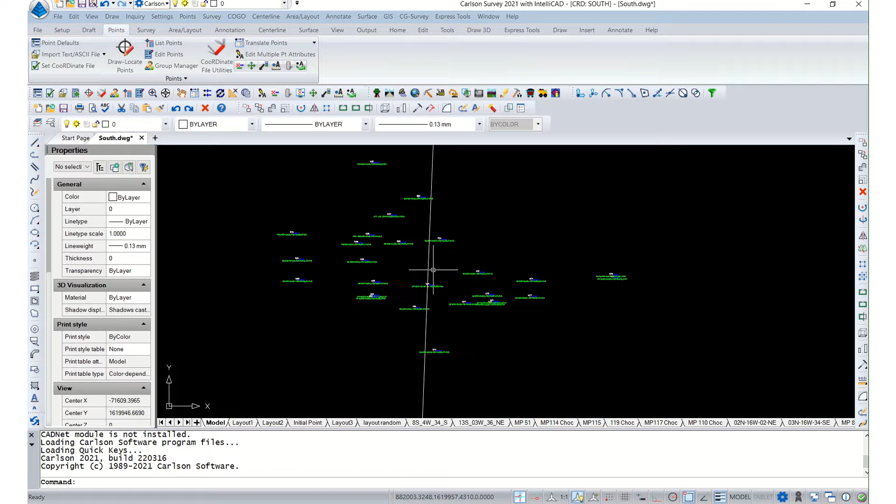Point in Nevada County, southern Arkansas. It's a PLSS corner, which is a railroad spike in the middle of a road intersection, so it's in asphalt. We took enough shots to get enough information to add to the sketch: the intersection, fence line, and we were able to measure all of our references with GPS.

So we're going to put the whole drawing together in Carlson. I'll start with just kind of sketching in these roads. Actually, I'll start with measuring to the references.

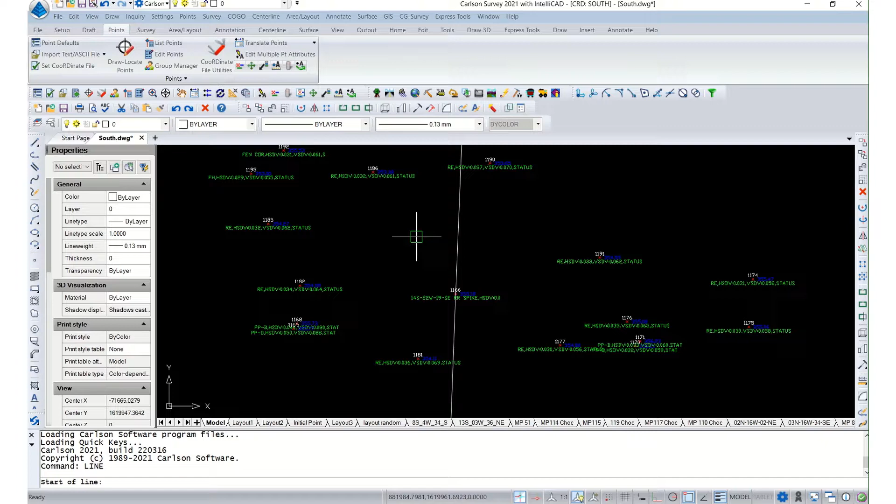So we'll do a line command. 3 of these references are power poles and 1 is a fence corner. That's our main point in the road, a railroad spike: Township 14 south, Range 22 west, Section 19, southeast corner. This fence corner is one of our references.

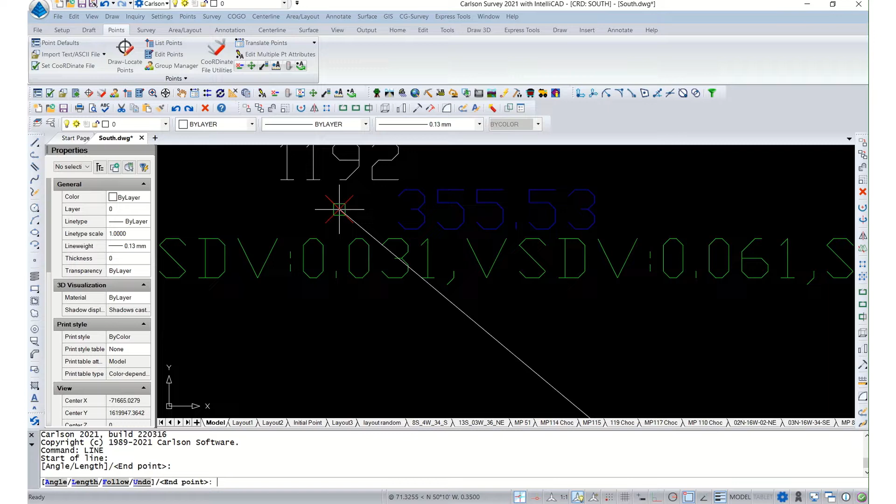Go ahead and draw another line. This is a power pole. I take 2 shots on a power pole since I'm using GPS, so I can get the center of the pole. We'll come back to that.

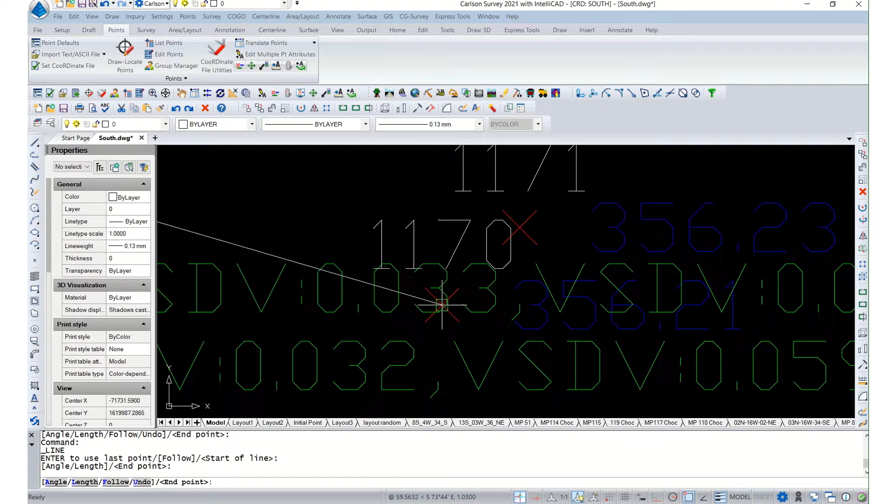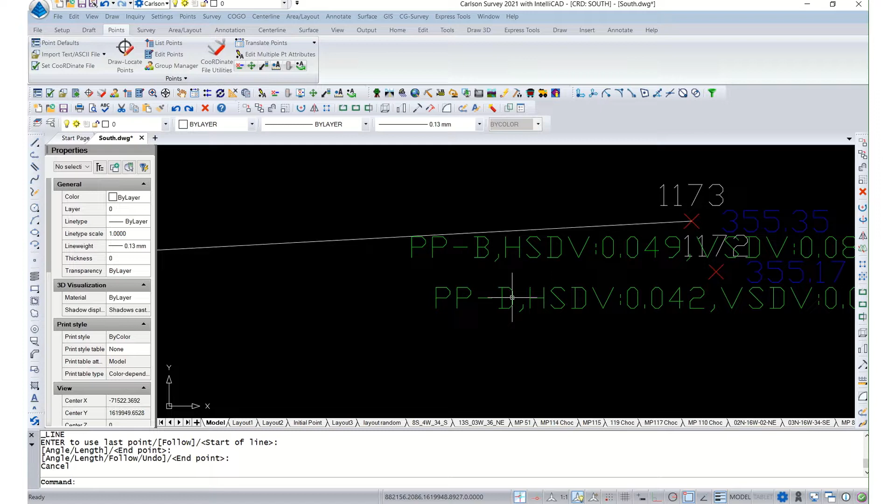Repeat line command. We'll go over this in just a minute. Let me get the other line in. And here it is. On power poles, I take 2 shots: one represents the bearing to the power pole, and one represents the distance to the power pole. So you can see this PPB is my bearing shot, PPD is my distance.

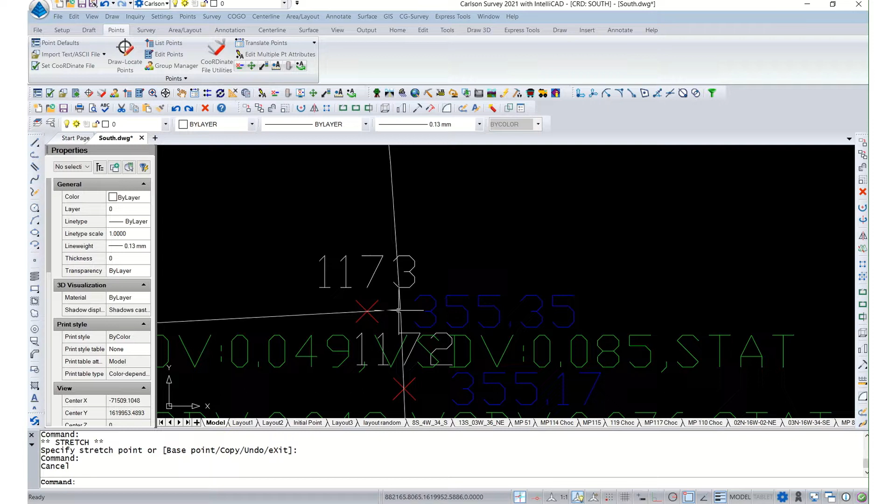We're going to adjust that point to estimate the center of the pole. Next I'll draw a circle, starting back at our main point. Snap to my distance shot. Make sure our nearest snap is turned on, which it is. And extend this line to the circle, so that point estimates the center of the power pole.

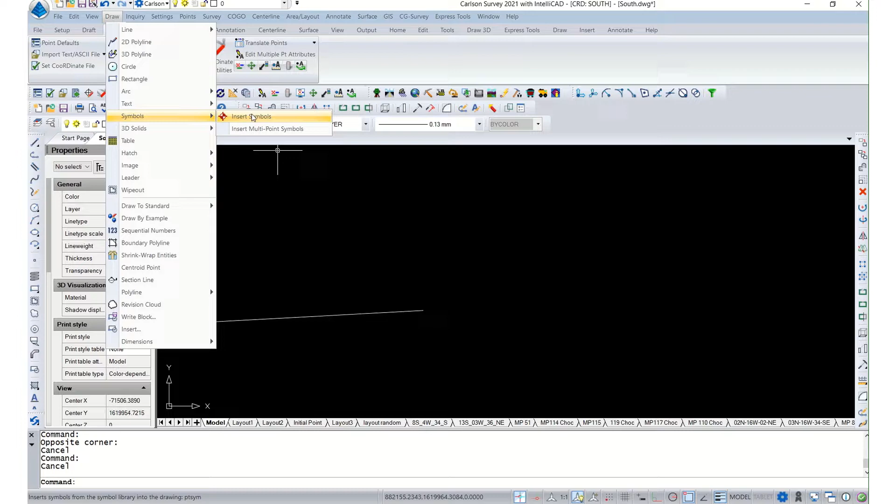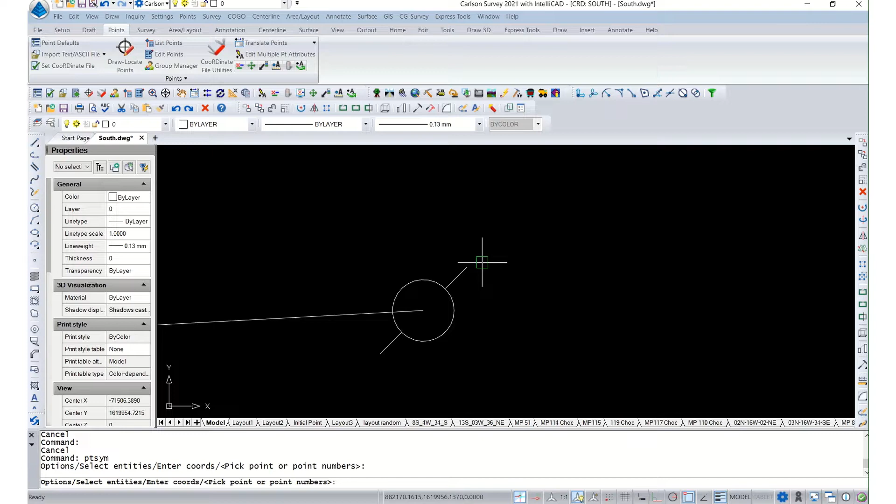We'll get rid of that, turn these off, go to my hide layer, then go to draw symbols, insert symbol. We'll change this to power pole symbol. Scale, I'll make that about a 6. Okay. And then snap that on there.

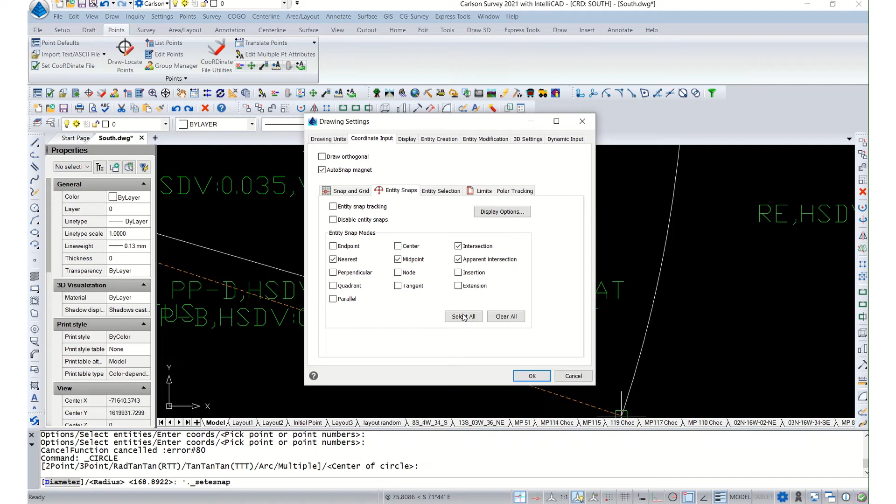We'll do the same thing here. I've got my bearing, and now I need my distance. Repeat circle command. We'll take my nearest snap off. Now we'll extend this, nearest. Try that again. Nearest. Okay.

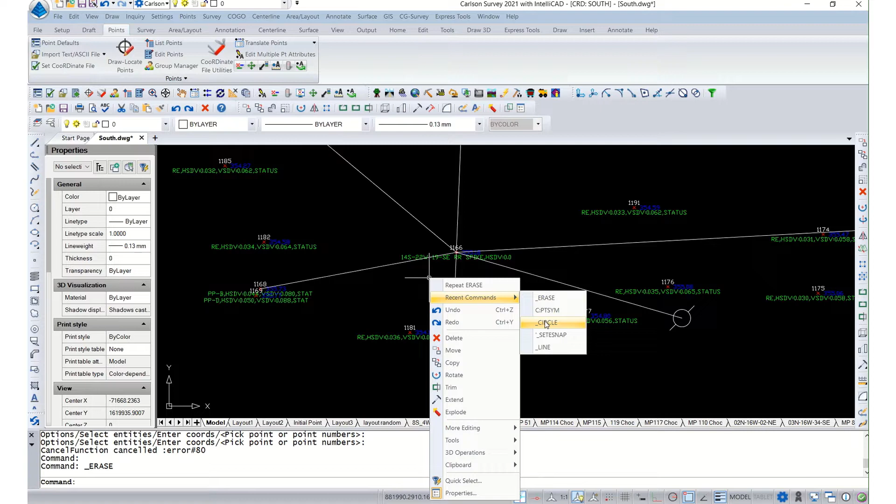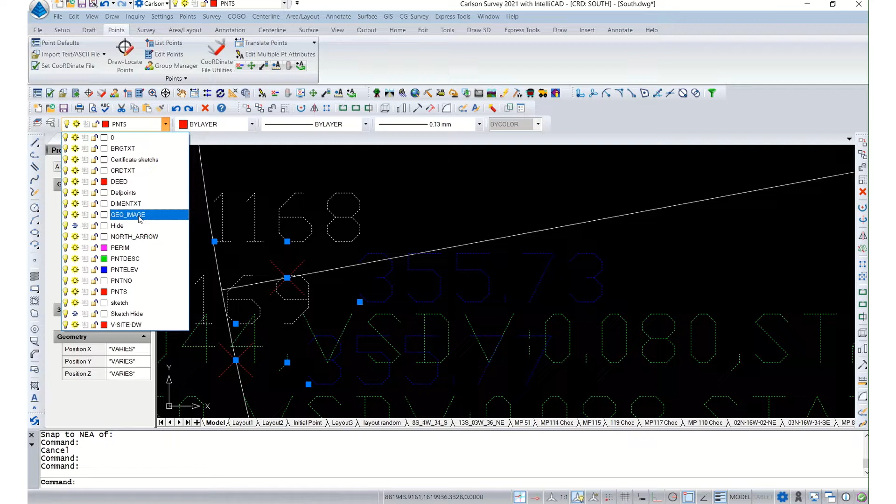Go ahead and turn these off. Repeat symbol command, everything's correct there. Pop that in. Get rid of the circle. Repeat circle command. Then we'll grab that, and then nearest, snap to. Turn those off. Repeat symbol command. There we go, get rid of that circle.

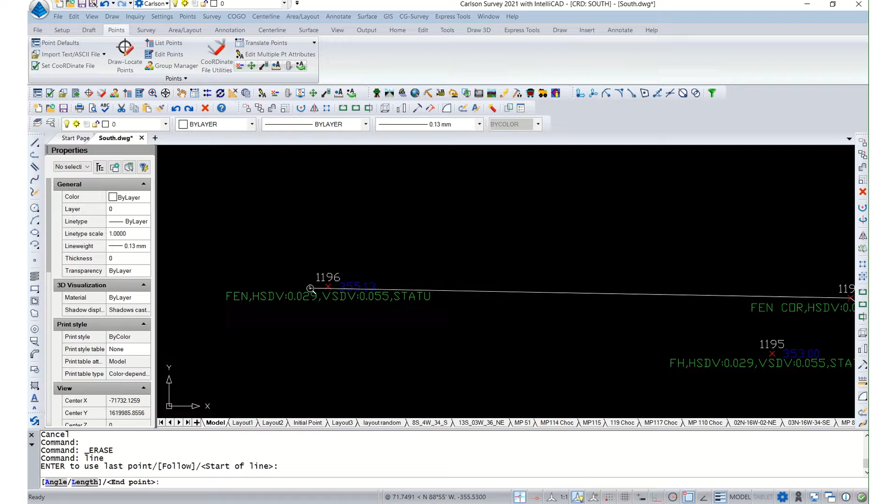Now that is just a fence corner, so let's go ahead and draw that fence in real quick. Let's do a line command, from here to here, repeat command, go from here to here. We'll change that from a solid line to fence line number 1. Line scale will start at 0.01, so that will look okay in paper space.

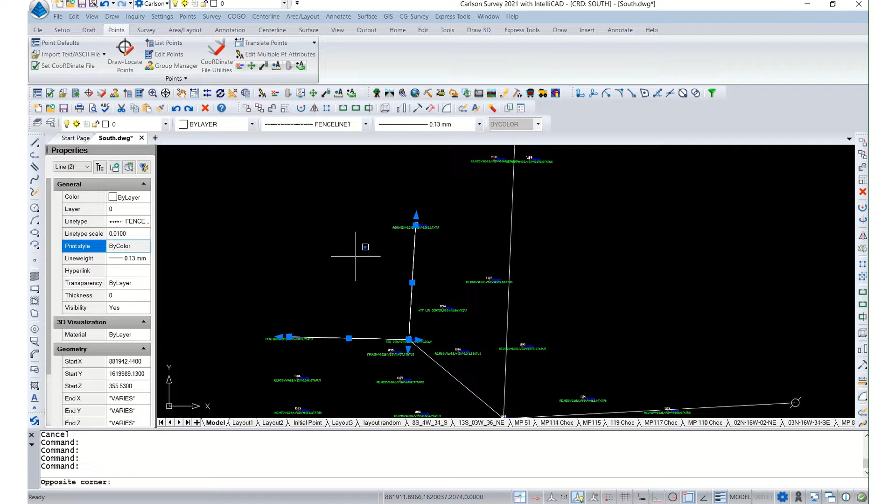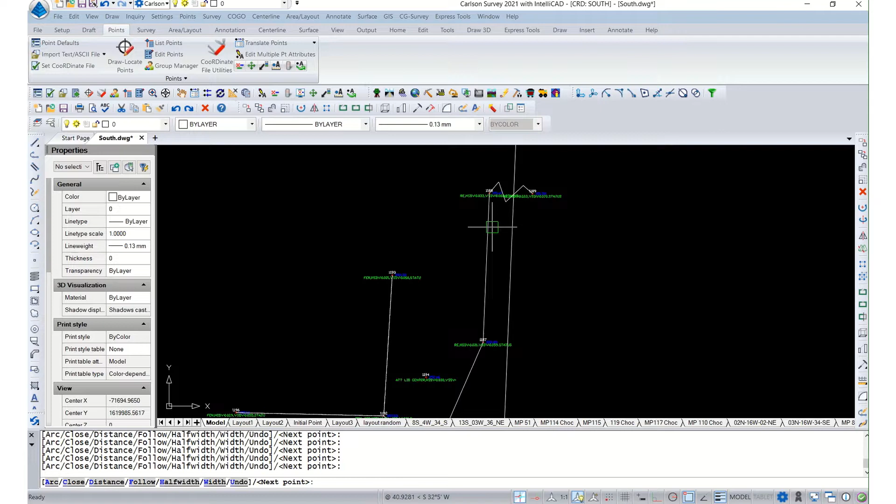Now I want to sketch in my 2 incoming roads here. We'll go to P-line. I'll start here, we'll draw these dirt roads in. Got a big radius on that incoming road. We'll just kind of put a break point there. Actually, I don't want to go that far. Let's do that again.

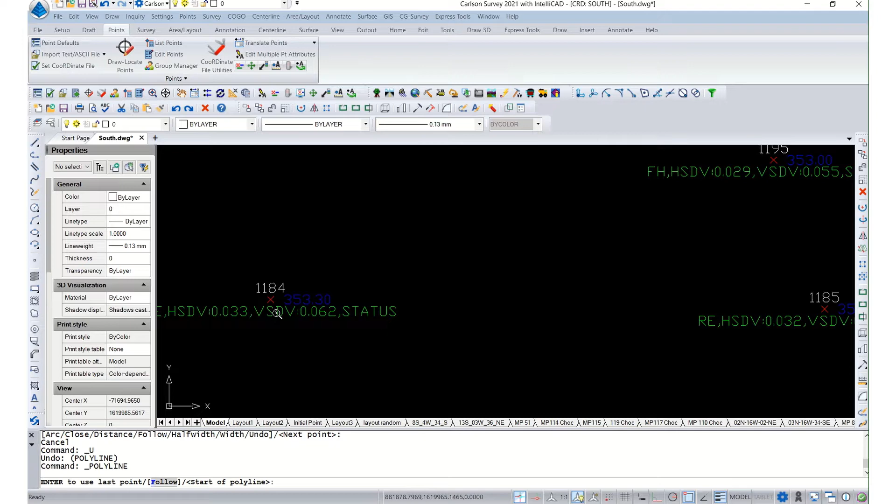So we have 2 different road types, so we'll do 2 different polylines. Road edge, road edge, road edge, and then jump all the way down to the other end of the radius, or the road intersection flare basically. There. Put a break in there. Okay.

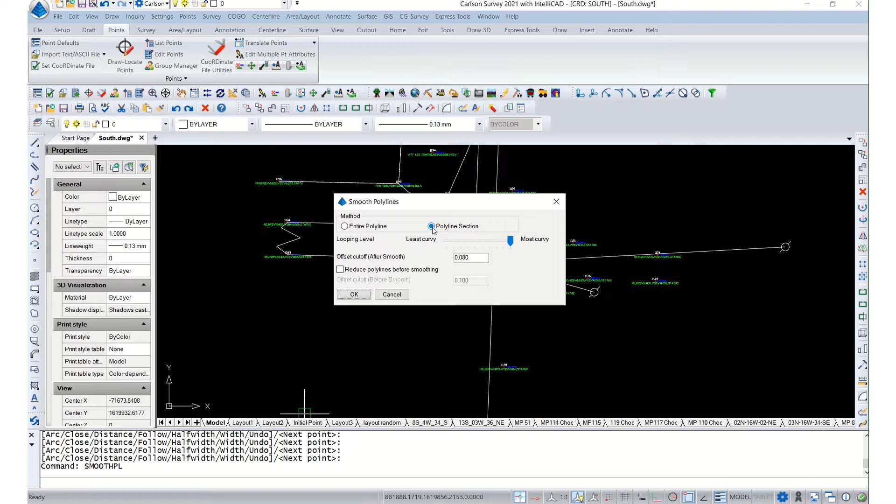Now I want to smooth those lines out a little bit, so command smooth PL. I want to do not the entire polyline, but a section of the polyline. Select polyline to smooth, select start point. Come back here, next point. Come up here. Bends it a little too much. Let's try that again.

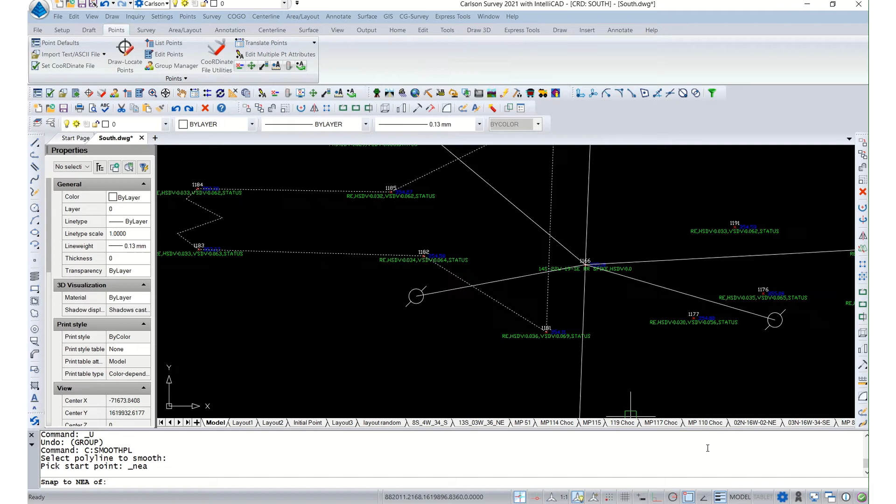Repeat smooth PL. Select that line, start point, select nearest, we'll hit it about right there. Now we'll hit that one. That looks a little better. Repeat command, line here. Start of curve, end of curve. There.

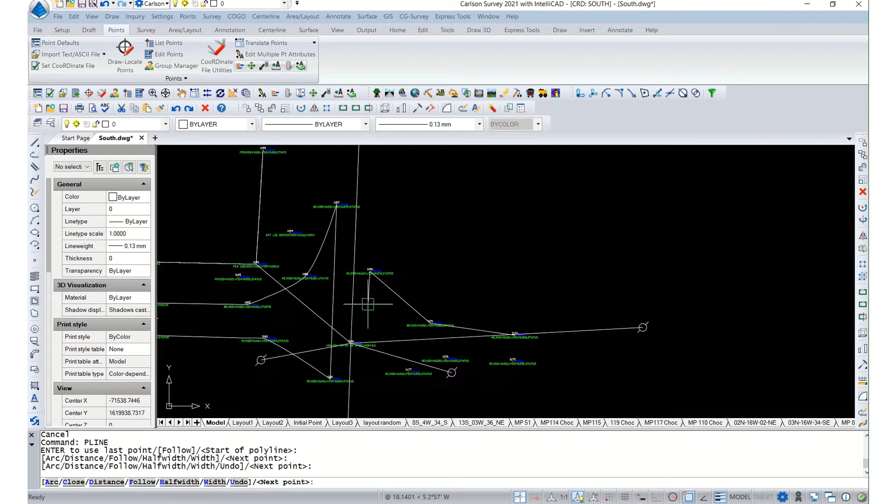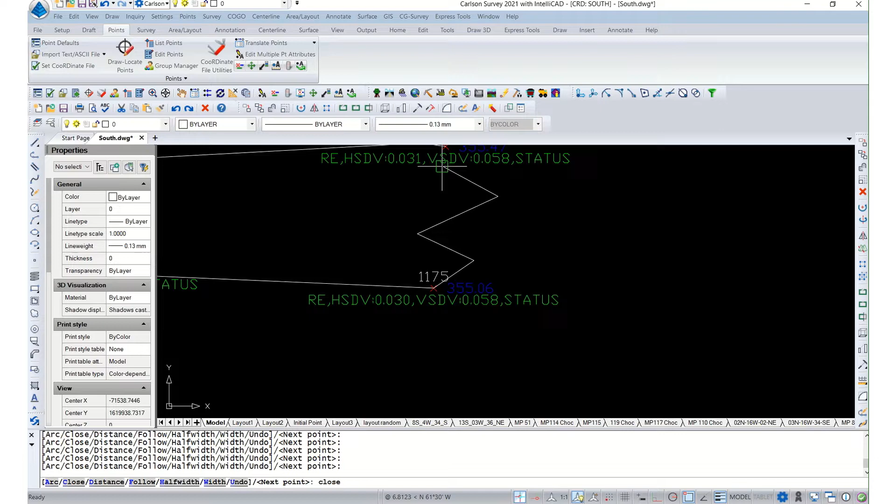We'll do the same thing with the other side. P-line: road edge, road edge, road edge, and then we'll jump down to the bottom of that intersection, road edge, road edge, break in here. Now I want to put a close command. Okay.

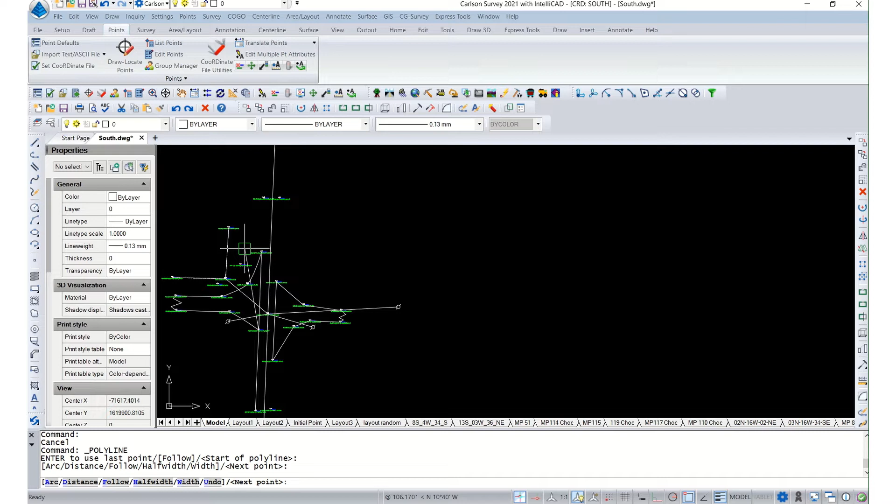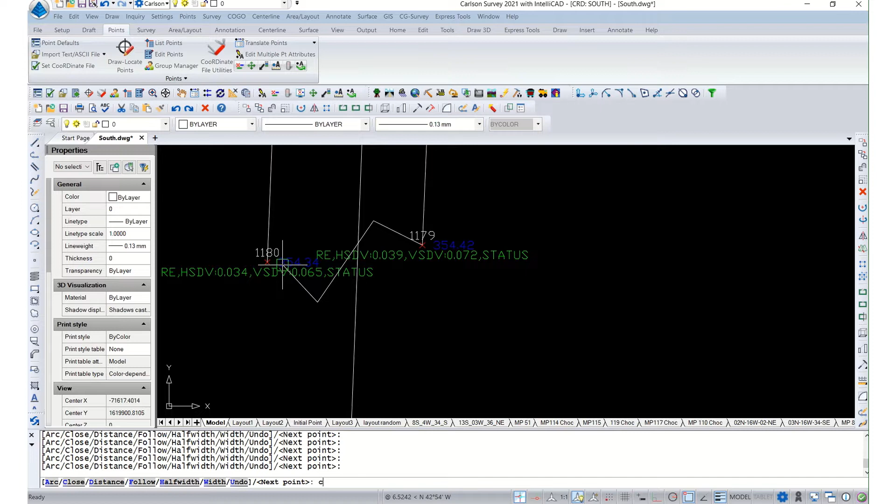Let's repeat the polyline command for the main highway. Come down here. Let's go ahead and close that. Okay. Alright, we can hide some of these points.

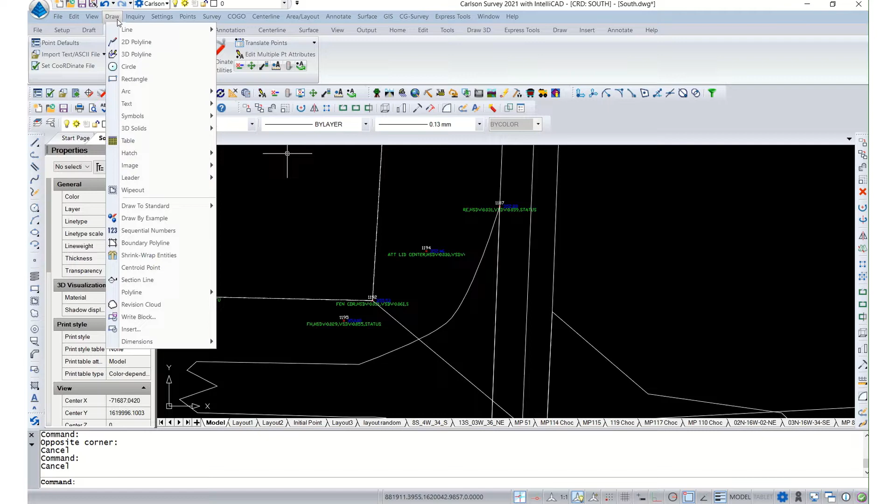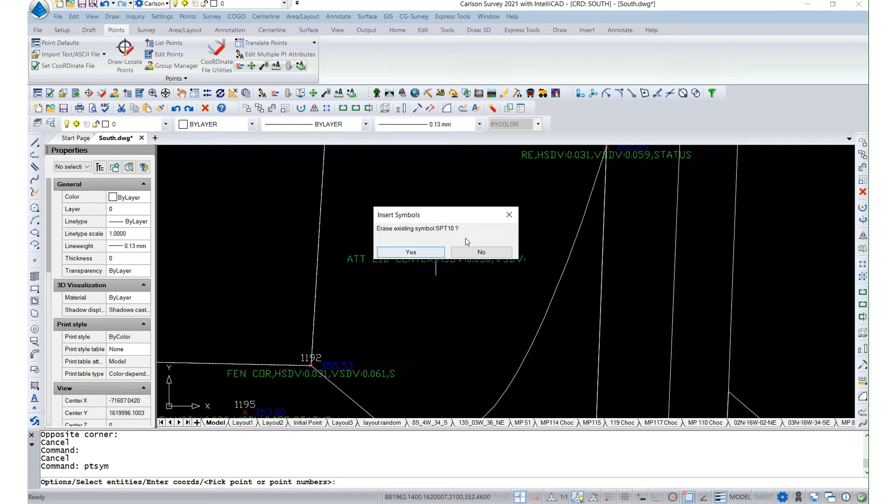Go ahead and replace these symbols. One of these is a manhole inlet. We'll try point scale 3. Do not want to replace it. That looks pretty good. Repeat point symbol, change that. C and G symbols, I think.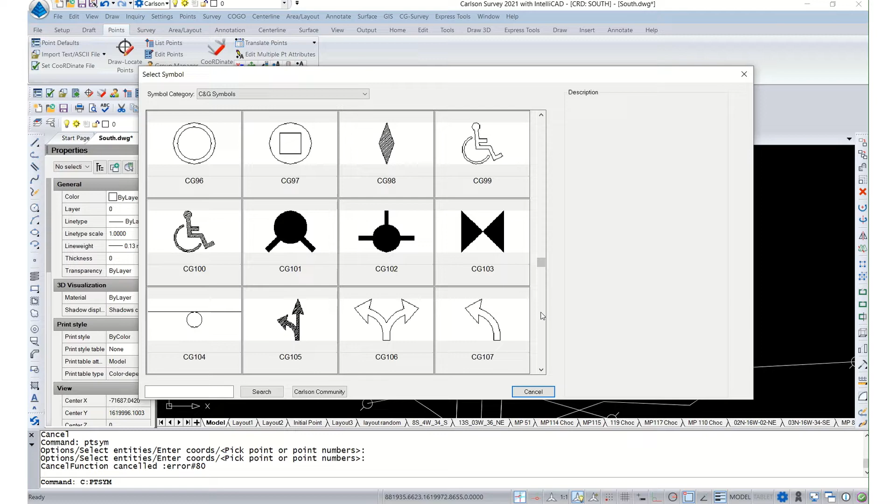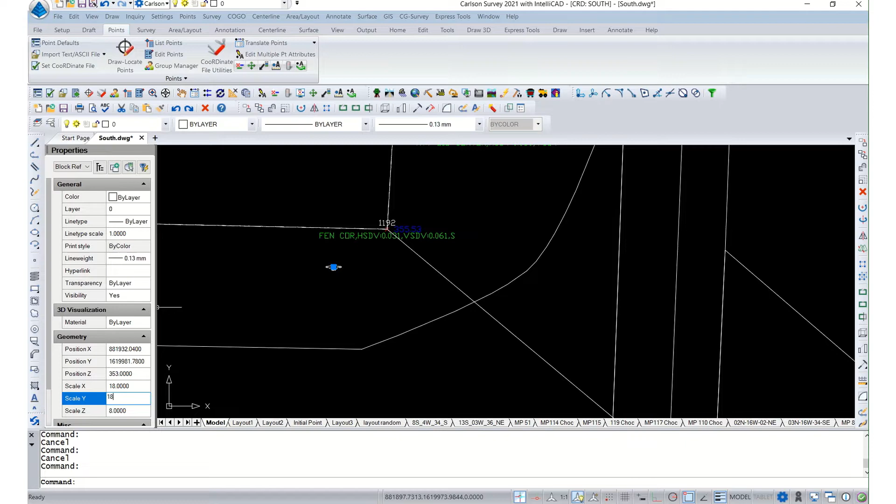There's fire hydrant, I'm going to bump that scale up to about 8. Keep that point. Go ahead and hide that. I want to increase that size a little. And hide that point. We can hide that point now. We'll bump that up a little. Go ahead and hide this.

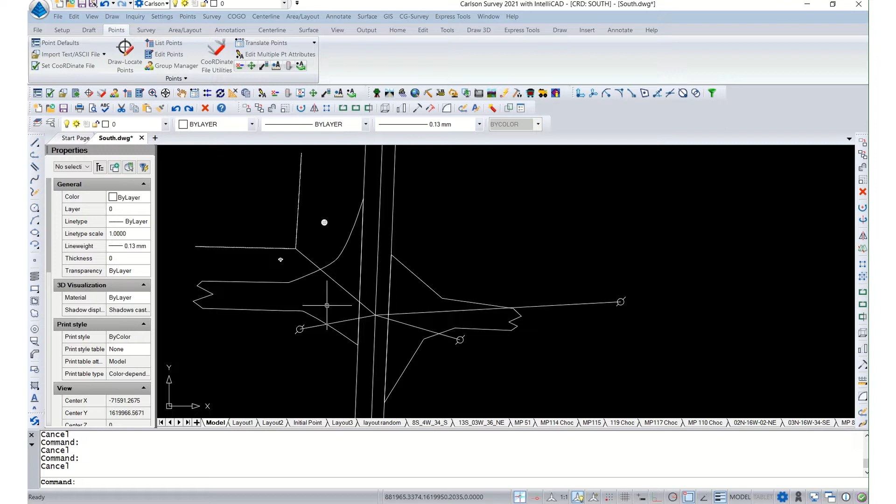Don't need those anymore. Okay, let's go ahead and start labeling these bearings and distances. Annotate, bearing distance. Actually, let's go back a little bit. Annotate, change the defaults.

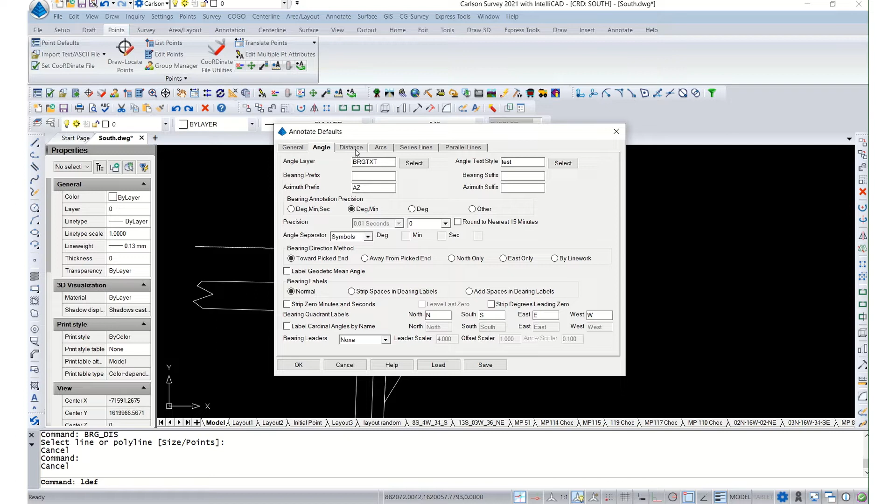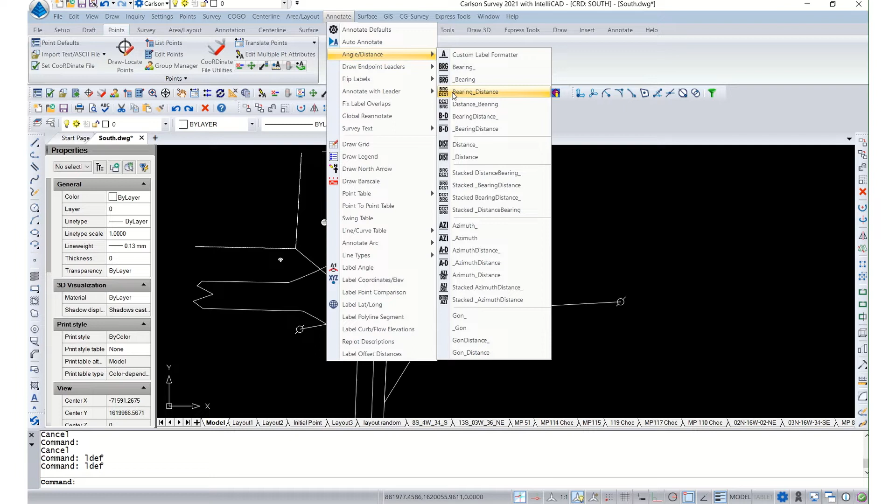Angle, we want, now that's good, degrees minutes. We don't want to go as far as degrees minutes seconds. Distance, let's pull that down to 1 decimal instead of 2, 1 decimal place. I think the rest of this looks good. I can adjust sizes later. Bearing distance. Yeah, I'm going to have to increase those sizes. Alright.

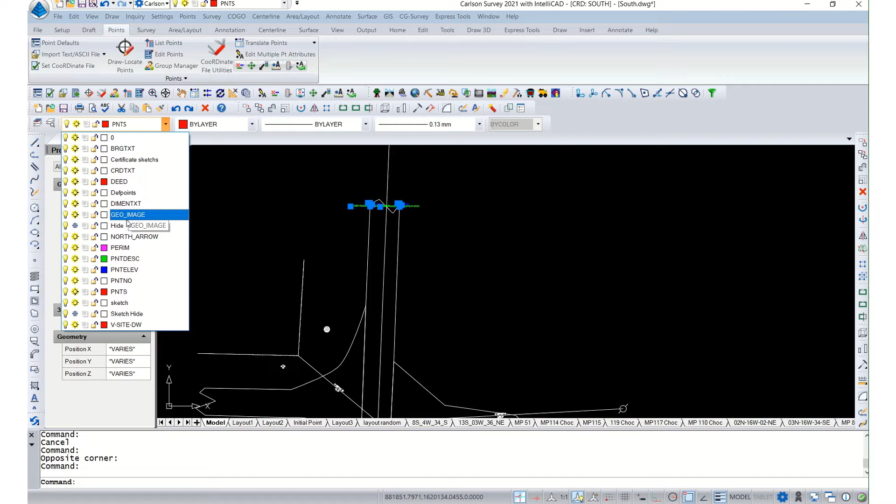Let's go ahead and fill in these, hatch these roads. See how everything lines up on paper space layout. You got kind of a long point there. That's fine.

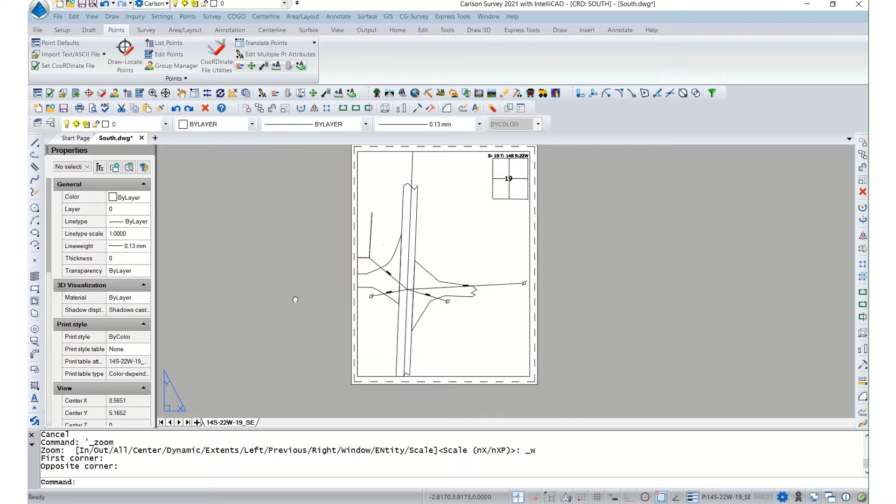We won't make a break line. We'll just kind of zoom out and try to catch everything to about that fire hydrant, I think. View, window. Just catch that fire hydrant and just catch that power pole. There. I think that'll work. Now let's go back to model.

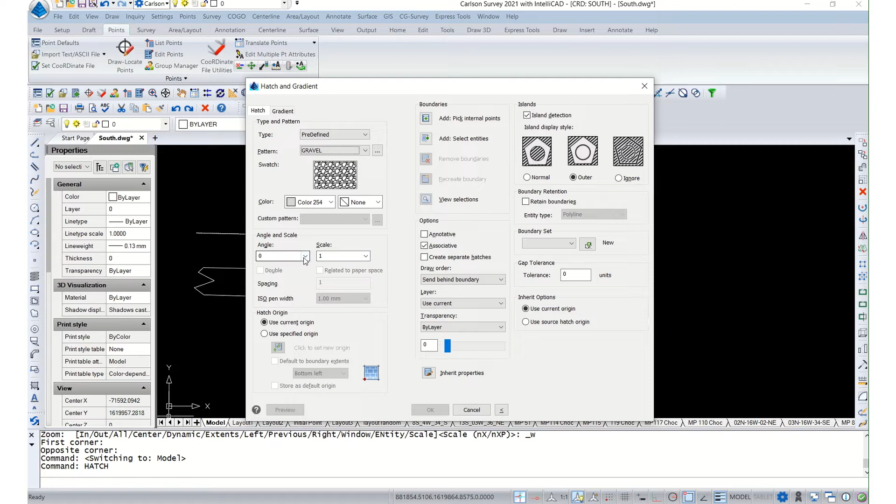Hatch command. We want to pick, I've got 2 gravel roads and 1 asphalt, so let's go to gravel. We'll leave the angle and scale alone for now. Select entity. It's giving me a warning that it's too dense.

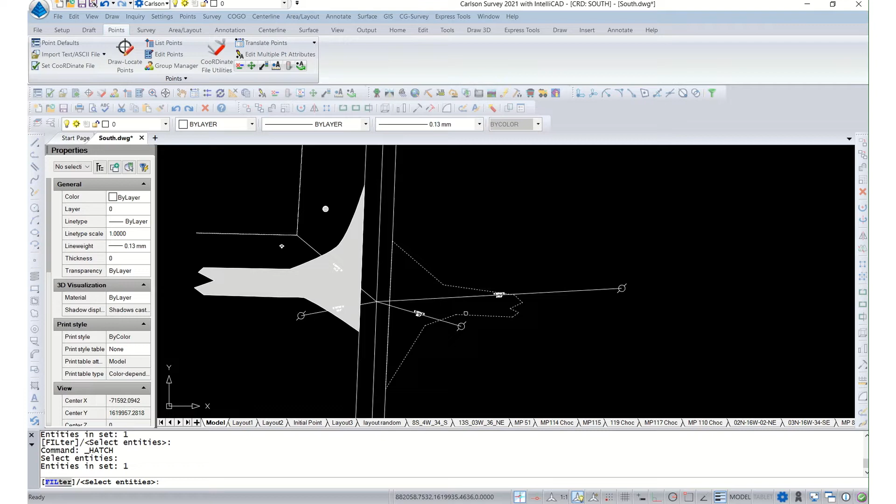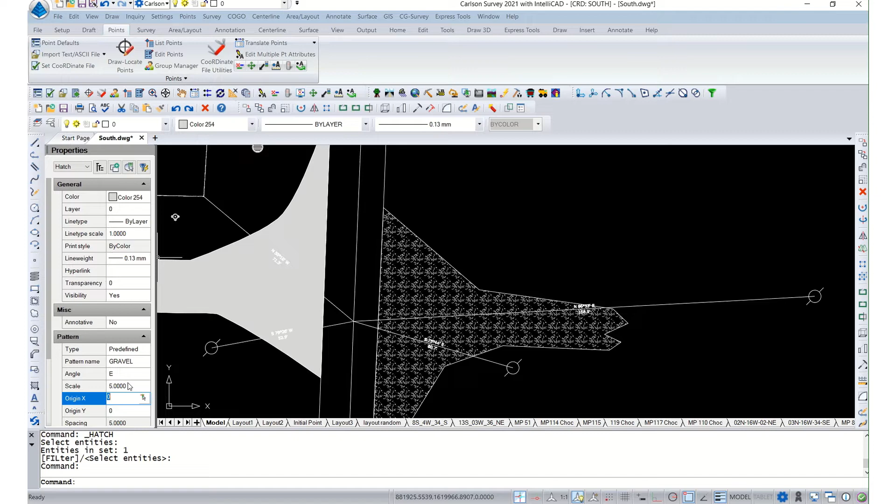We'll adjust that later. So repeat hatch, gravel, select entity. Okay, it's giving me the density warning again. We'll override it. Now let's adjust the scale and increase the size. Let's try 5. That looks pretty good, so let's do that over here to scale number 5. Okay, I think we can live with that.

See how it looks on paper space. I can live with that. Let's do something about this road. Repeat hatch.

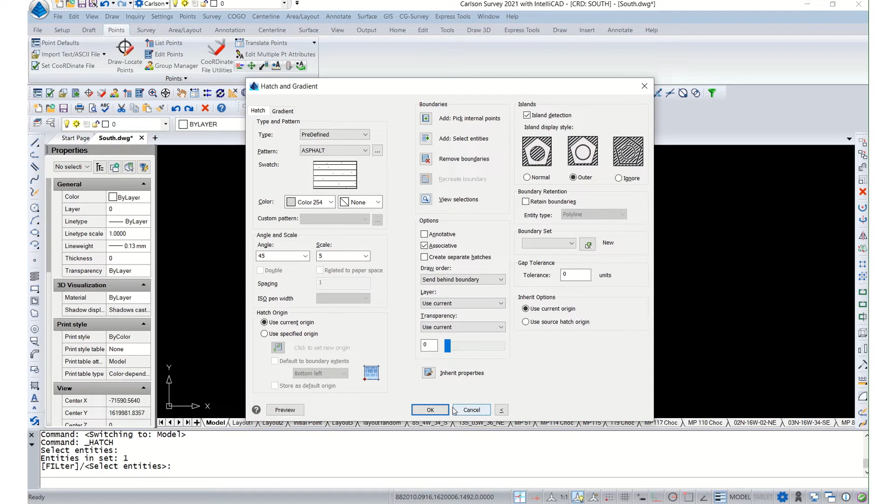Let's go look at these. Asphalt, change that angle to 45. Scale, let's try 5. Select entity, there's my entity. There we go. Might be a little bit too dense. We'll run with it for now though.

So I can see my text is pretty small. We're going to increase that size. So we're going to window in, select the text. So go over here to properties, mText, text height. Let's try 2, maybe 2.5.

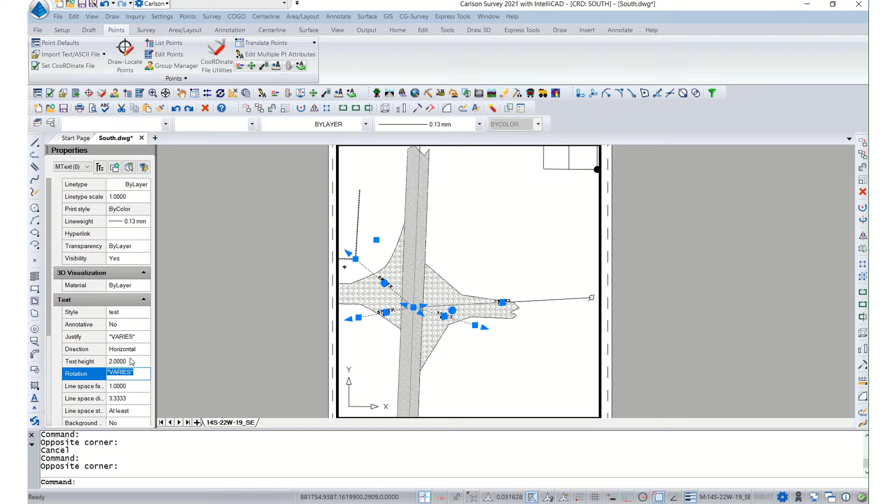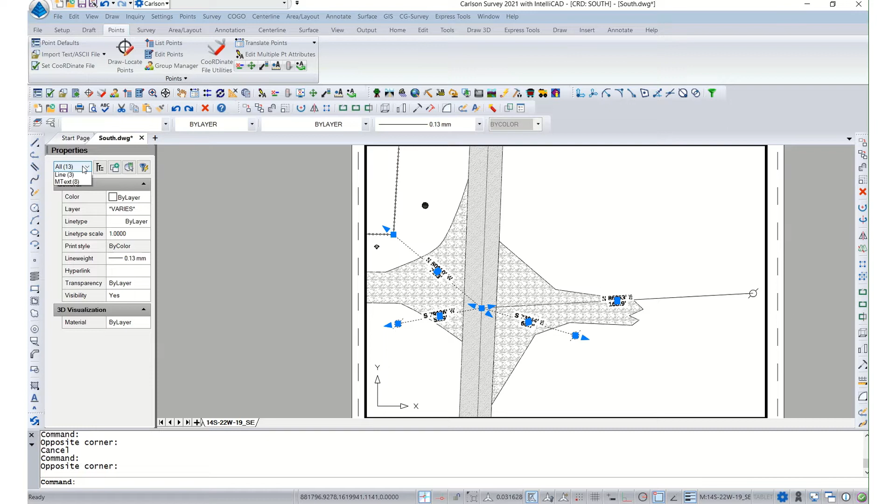Now it's kind of interfering with the hatch background, so we can fix that. Let's go back and select mText, background, use background mask. Okay, let's try that again. Okay, background mask is on.

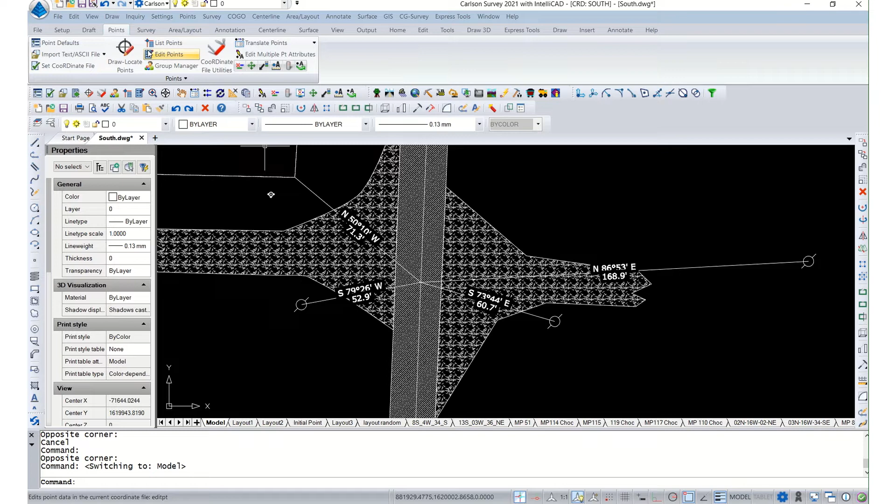We need a symbol for this main point here. Let's go to draw, symbol, insert symbol. Go back to points. Maybe number 5 on the scale. Let's try that, see how it looks. I can live with that.

Looks like we need to add a little separation to our bearing and distance. So let's go ahead and fix that.

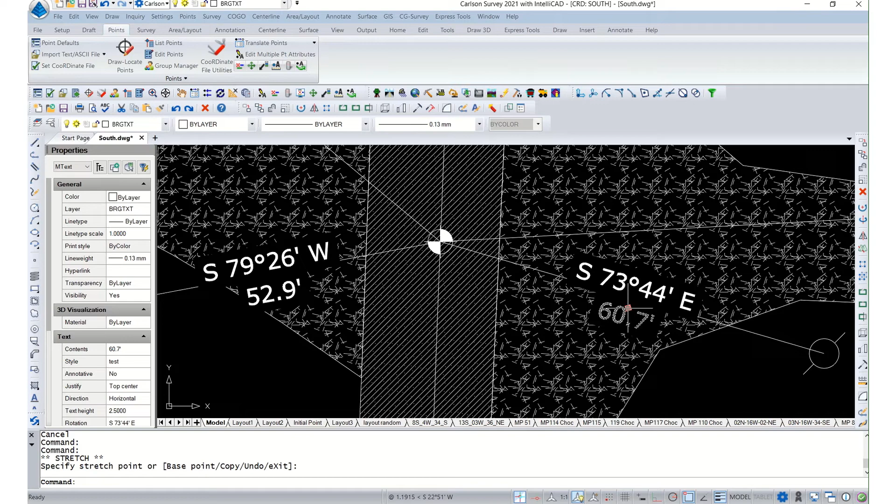Okay, let's go ahead and label this section corner point. Let's try a line. Okay, put an arrow head on it. Arrow HD command. Size 4 is good. Select the line. Okay.

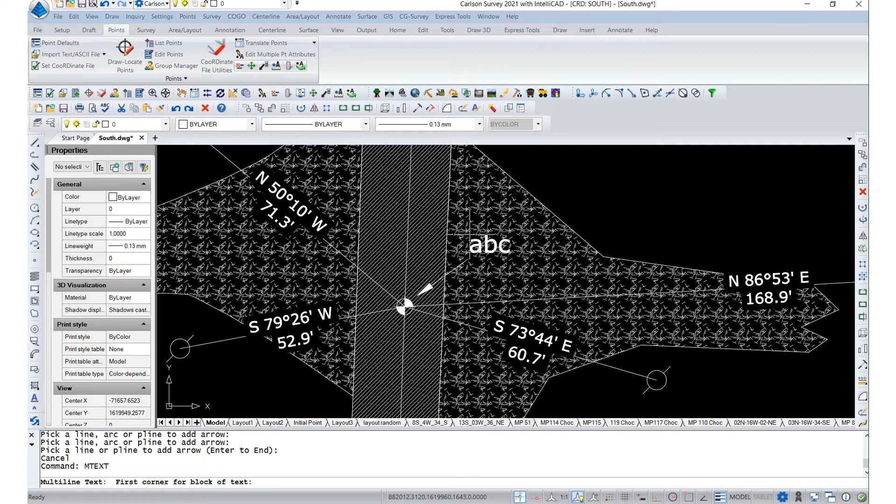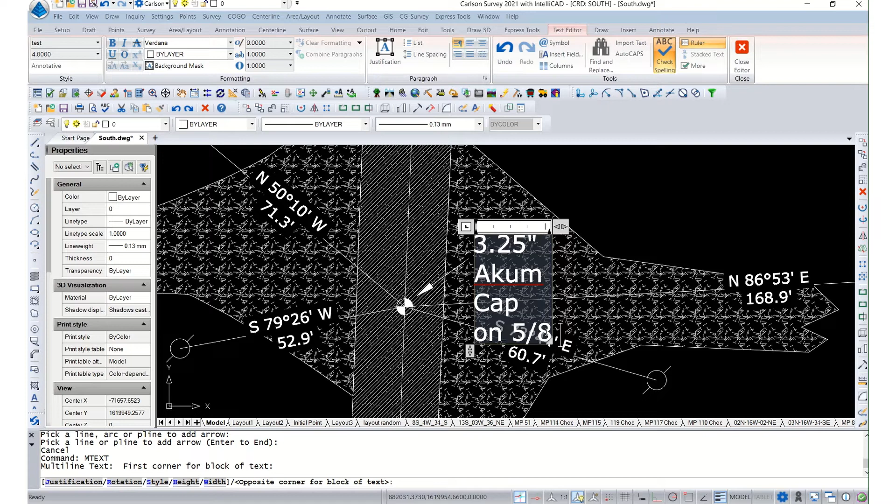Text. Select its location. Okay, we'll call that a 3.25 inch aluminum cap on 5/8 rebar.

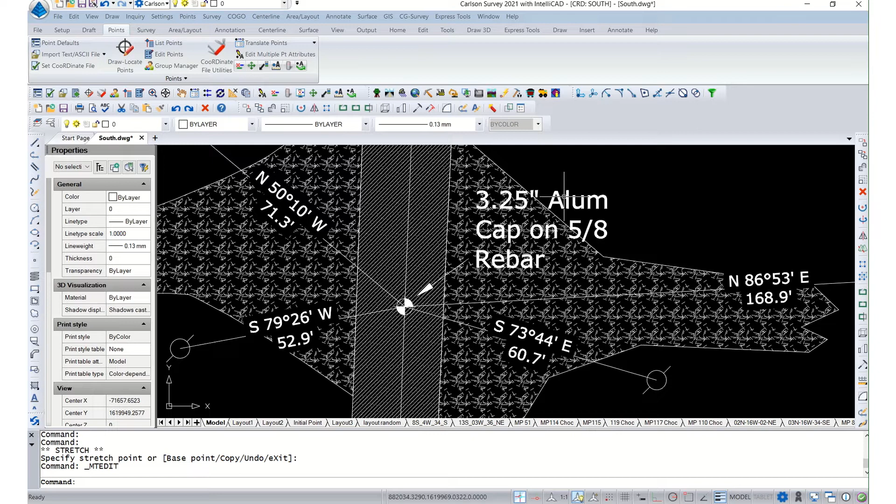Might want to bring that out of the hatch. Okay, see how that looks on the layout. I could probably shrink that up a little. Yeah, okay.

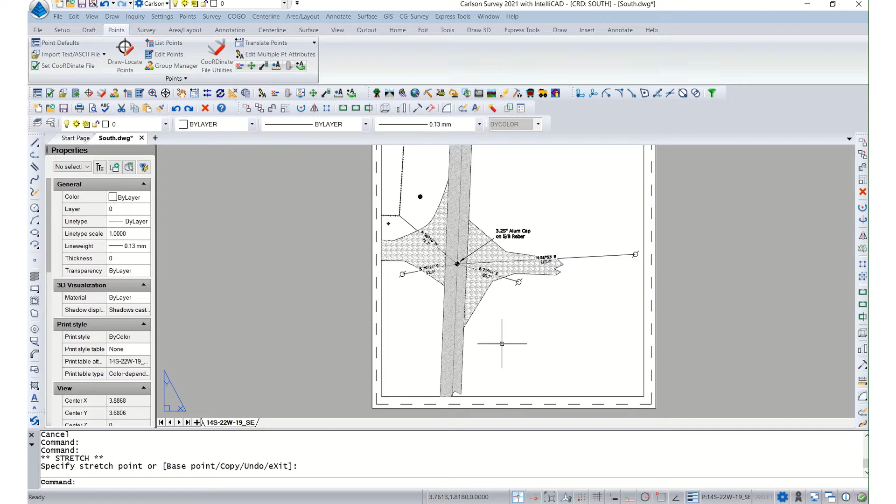What else do we need? So we've got the section, township, and range. I don't have the pictures downloaded yet, so the next thing I would do is insert a picture of the aluminum cap, and then insert the seal, signed and dated seal. And we need a north arrow.

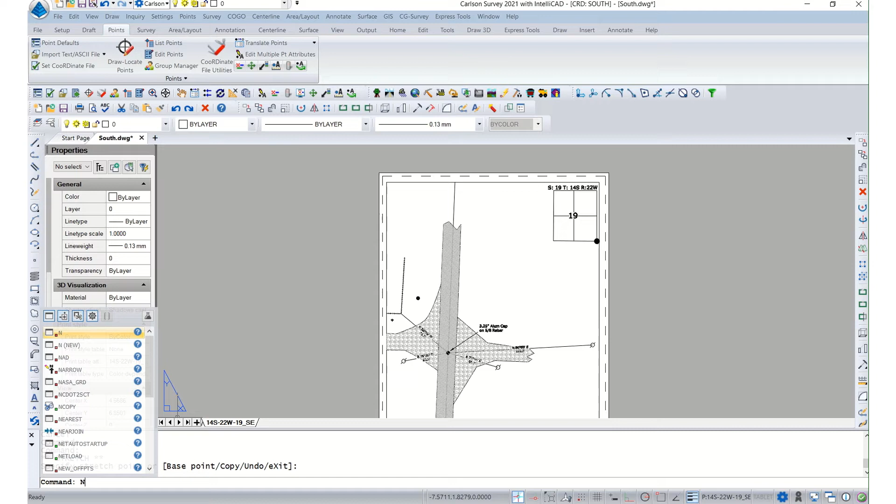Got a crazy scale there. Let's pull that down to normal size.

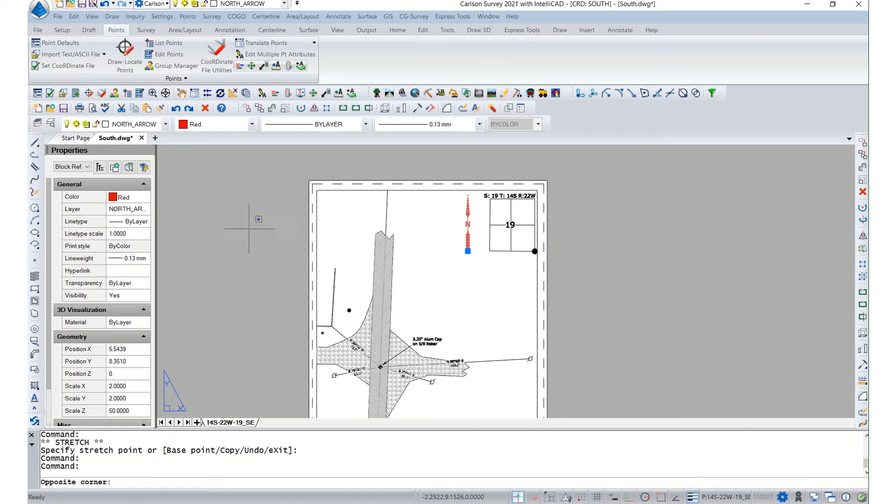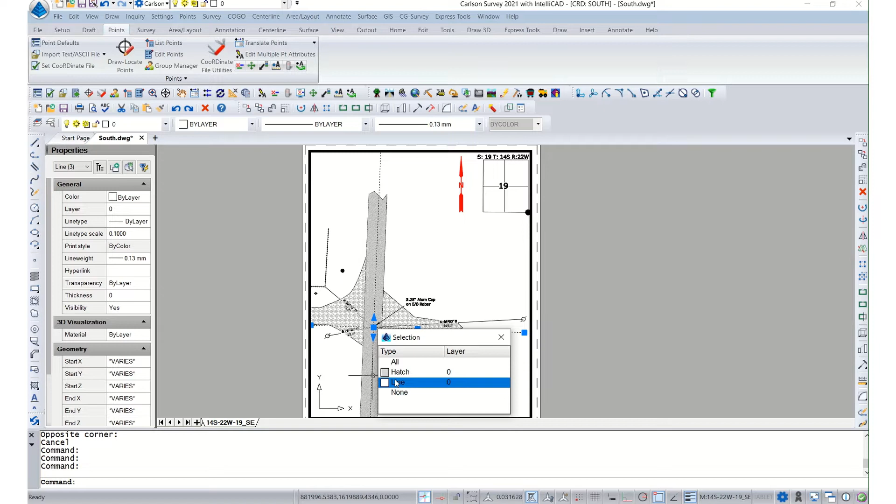So I want to finish this out with a little bit of labeling. So I kind of want to label my sections. We'll change that line weight to differentiate from the rest of the drawing. We'll make that a little bigger, say 0.6. Change the color. I've got some text here that I already like the format of it, so I'm going to copy that.

We'll put a section label here, here, here, and here. So that's going to be section 19. Would be section 20. Section 29. And section 30.

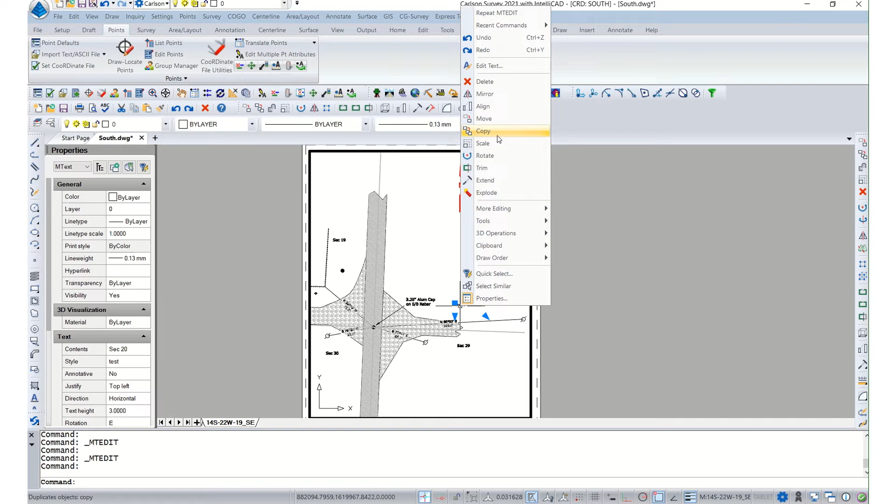Okay, I want to label these power poles. Turn off my snap because that's going to cause me some issues. And we'll label that one. And we'll label that fence corner. I might have to make the text a little bit smaller. So I'm just going to call that, just give it an abbreviation there.

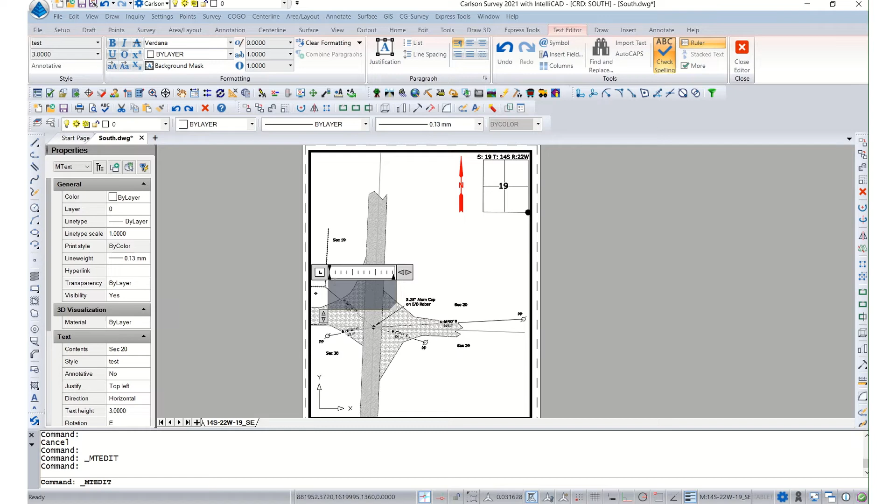This is a fence corner with a location tag.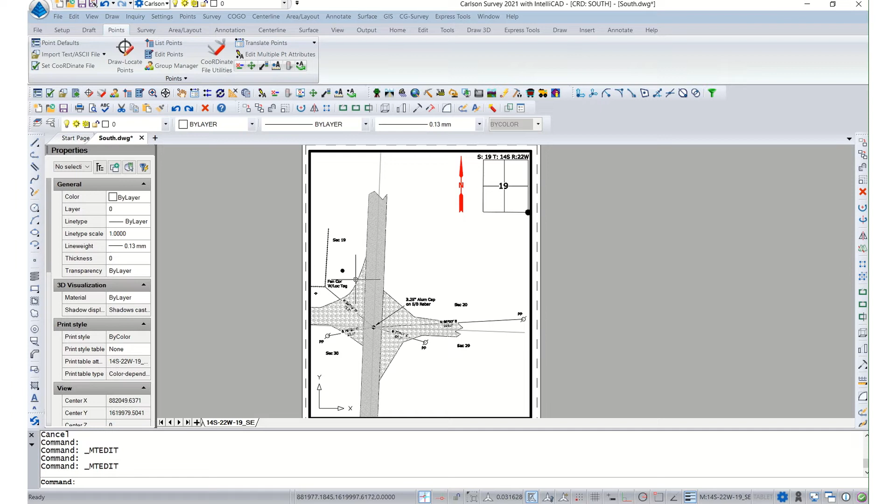That's just about it. I'd still need to insert—I left a little room here. I think I want to insert a couple of images, especially of this monument, and if I have room left over, I'll put some of the surrounding area.

Okay, before I insert those images, let's just take a look at them. So these are the images from the fieldwork.

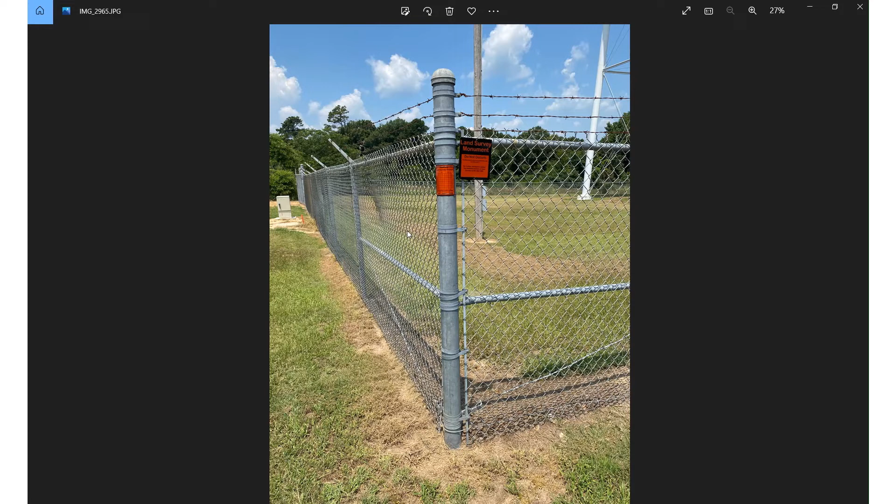So that fence corner looks like this. It's got the location tag on it. That's one of the power poles, and that's another power pole. So this is the north-south road, Highway 53, and the east-west is a gravel county road. You can see one of the power poles and the fence corner looking to the west in this image.

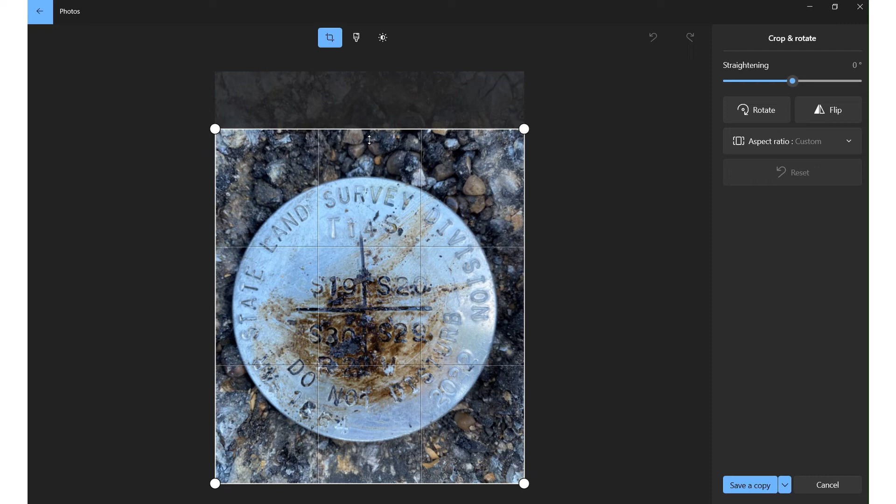That is the RB cap. We'll go ahead and edit that while we're here. Can I edit that? Yeah. We don't have much room to maximize our space on the drawing. I want to crop that down. Save.

Okay, so the reason it looks like this is because we hammered in all the numbers and the X here, cross, and the Township 14 South, Range 22 West. And to not damage the lettering when we hammered it onto the rebar, we used a block of pine, and it was about 100 degrees out there, and sap was pouring out of this block of pine. And when we hammered it, used it to hammer it on, some of that sap got on the monument.

But anyways, looking east, we're looking at the other gravel road crossing. You can see that we set this by—there was an existing railroad spike, and it was about 1 inch under the chip seal surface. So we carefully chiseled out and found the railroad spike, and then we chiseled out a slightly larger area, just big enough to fit the RB cap slightly flush, and then we hammered the 5/8 rebar down right next to the railroad spike. We left enough of the rebar exposed to then tap the RB cap on.

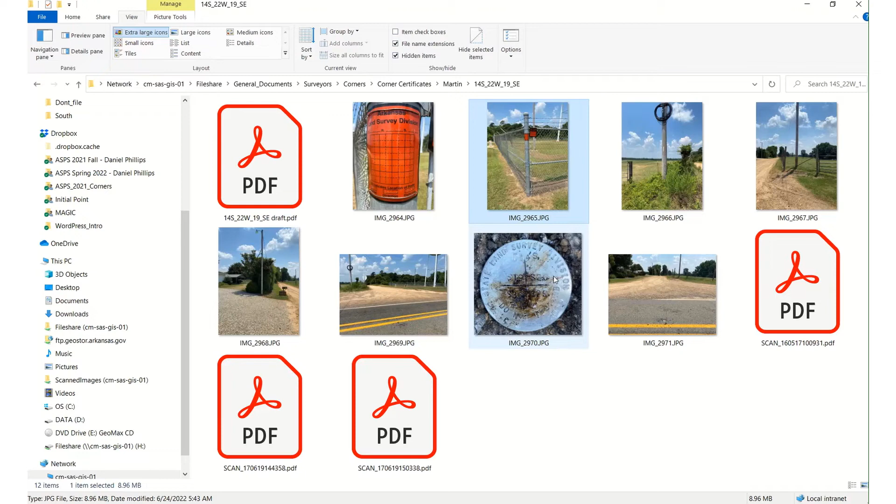Anyway, that's all the photos. I want to insert the RB cap photo, at least that one. So we'll copy that file path. Come back to the drawing, and now all I have to do is type image.

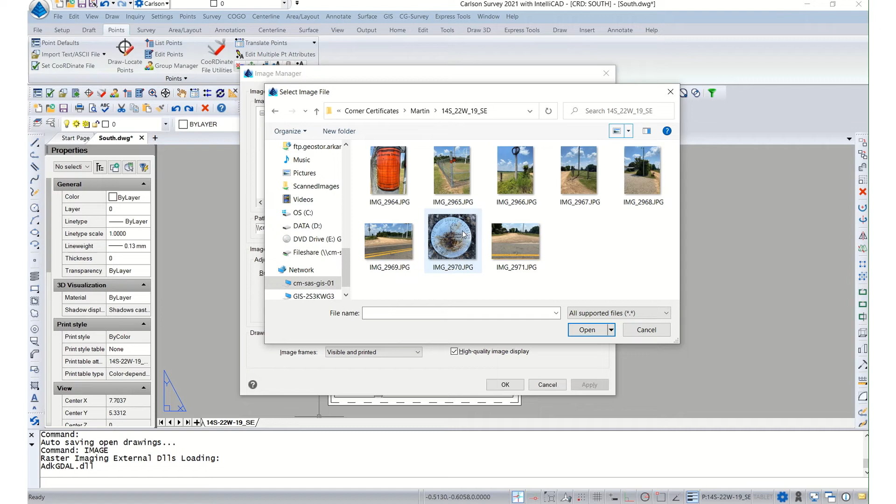And this is what I'm looking at. We're going to attach—so we'll go to that file path, find the RB cap photo, and then pick an insertion point. I think that'll work.

We'll put it by the description, and certification will go in the lower right. So there's not really enough room to add the other photos, which they'll be in the certificate anyway, so I'm going to leave those out this time.

Let's go ahead and add a description for these county roads and that highway. Let's see—I don't know the county road names, but I can find them here. So that's Nevada County 49, and the north-south road is Highway 53.

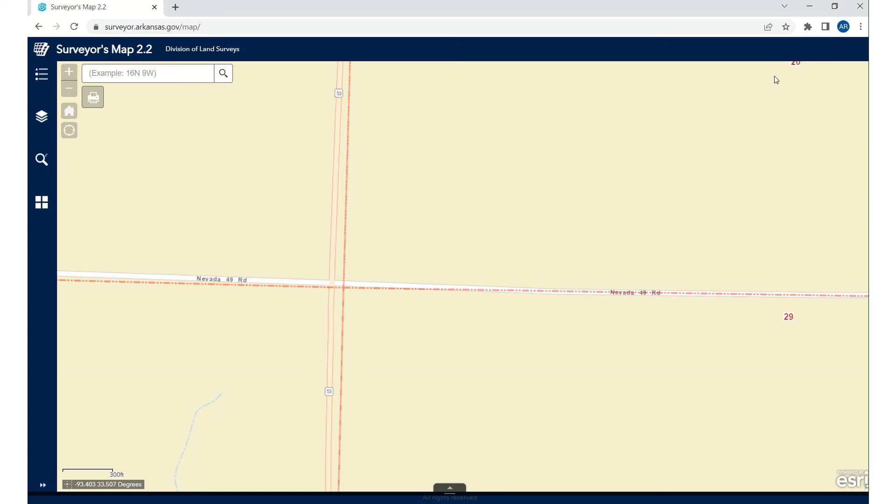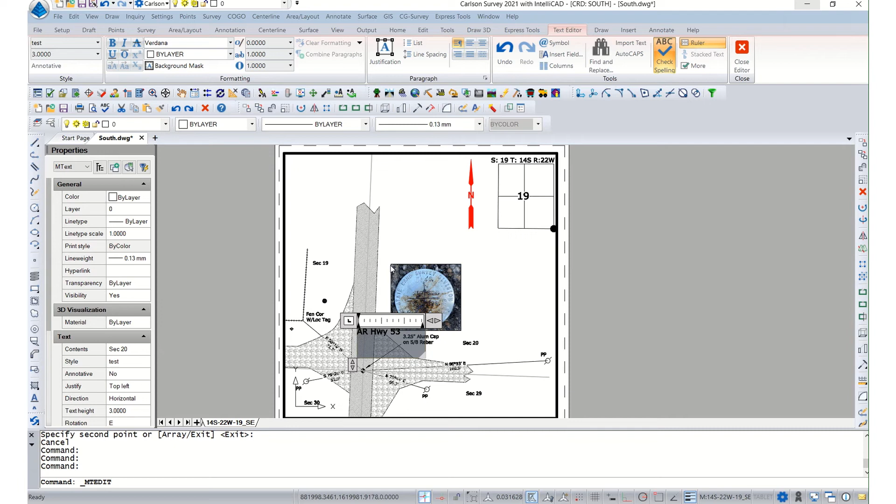Alright, let's pick some text that we like. Yeah, they're all about the same size, so let's pull that in there. MText—that's AR Highway 53. I shouldn't have put it right over the hatch, but we'll make it work. Let's rotate that around, and let's increase that size a little bit.

Now we want to add that background mask. We might not even need that mask, actually. Let's see how it looks without it, because that's kind of large. Take that off. Okay.

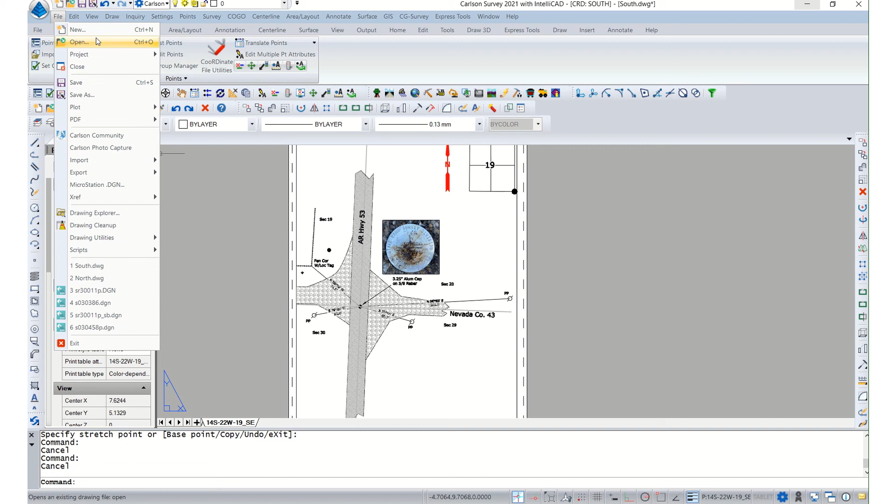Remove these other pages, publish. Okay. Now I will check. And here it is.

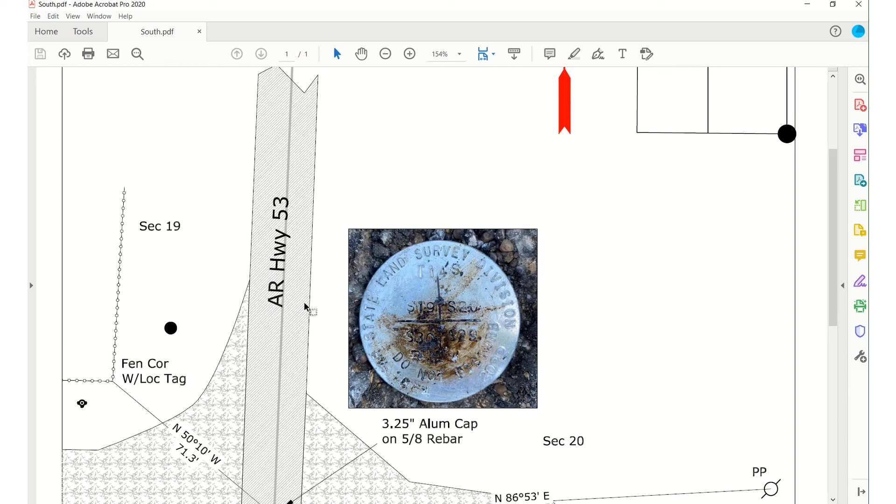So that's just a very fast and kind of rough drawing. I'm sure a lot of you out there are a lot better at this than me, and if you spend a little more time on it, you can get this looking really, really nice. I just kind of wanted to show a couple of the tricks that I use, and maybe someone out there can pick up on something they haven't seen before. I just want to demonstrate it's pretty easy to do these sketches for corner certificates, and there's a couple little shortcuts, and that's all there is to it. So I hope this helps somebody out, and thank you for watching.